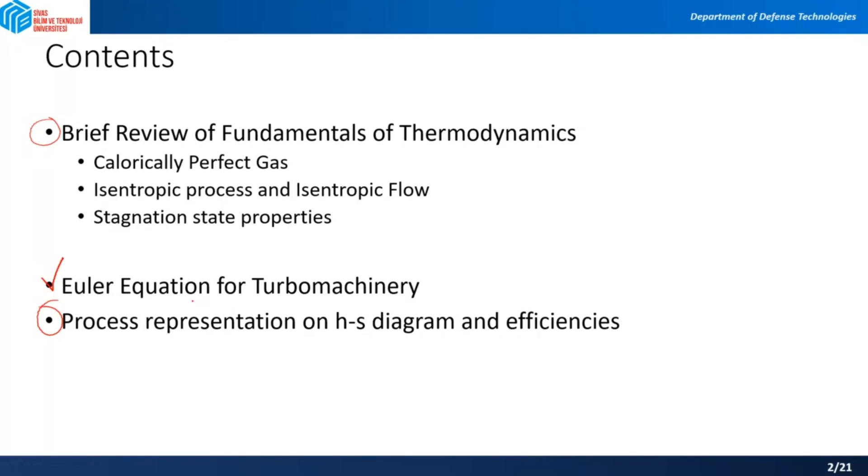Especially from this Euler equation for turbomachinery. So if you remember, we had a perfect gas, and we had these assumptions there to enable us to use the kinetic theory of gases. What are those assumptions?

First assumption was that we have negligible or a small amount of intermolecular forces between molecules. And then we have the volume of molecules that occupies space, also negligible, and we usually ignore it. Based on these assumptions, we come up with the perfect gas law, and this perfect gas law is actually derived from the kinetic theory of gases.

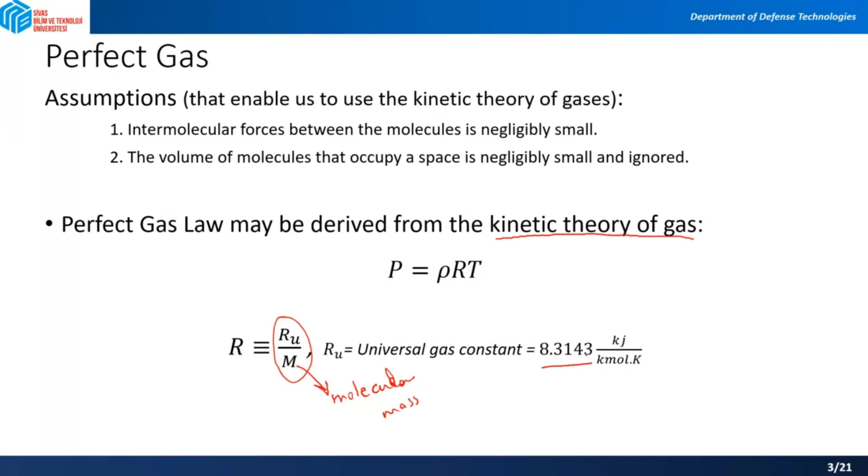You remember this also from early studies in physics: P is equal to rho RT. And what is R in here? R is the gas constant, and it is defined by the universal gas constant divided by the molecular mass of the gas. M is the molecular mass, and RU, the universal gas constant, is equal to 8.314 kilojoule per kilomole Kelvin.

As another reminder, you had these specific heats for a perfect gas. PG stands for a perfect gas, and also calorically perfect gas. Remember, you had in your thermodynamics, aerodynamics courses, a defined specific heat at constant pressure and volume. For example, if you use your enthalpy, you define H as the multiplication of the specific heat at constant pressure by your temperature.

In general, we were saying that your Cp, specific heat at constant pressure, is a function of temperature. And the same applies to the internal energy, and it's equal to Cv dT. So Cv is the specific heat at constant volume, and that is also a function of temperature.

And there is a simplifying assumption of constant specific heats. So whenever we say Cp is constant, Cv is constant, we generally simplify this because these are a function of temperature. But if we are dealing with a narrow temperature range, we assume that for a calorically perfect gas, these two will be constant.

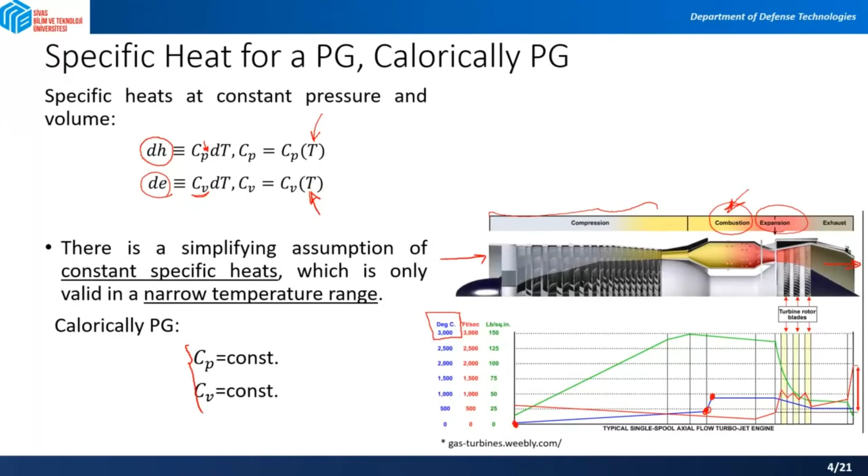It is a point function. So this total energy is actually the summation of what? Internal energy, kinetic energy, and potential energy. So we have these three together. But when you look at this first law in an open system, the open system is a system that is interacting with the environment. So it has some inlet, it has some exit, like the jet engine I previously showed you in this slide. You have this inlet, and at the end you have this exit.

So you have to use the open system shape of the first law. What is changing when you compare it to the closed system? Actually, for open system, you write everything as a rate. So what do I mean by rate? Rate means...

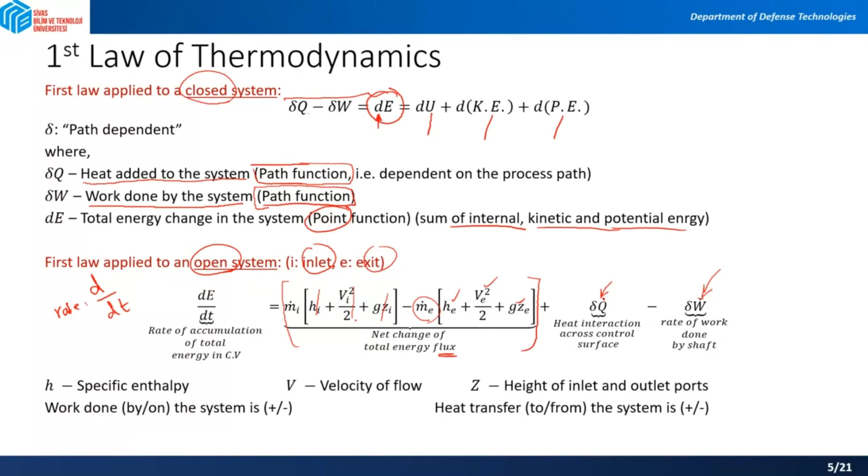This is the representation of the first law applied to an open system.

Now let's look at the second law. As you know, it is a statement of the impossibility of a heat engine - a heat engine exchanging heat with a single reservoir and producing mechanical work continuously. Actually, the second law says that you cannot have a machine that is just interacting with one source of heat and then gives you mechanical work. It necessarily has a second reservoir at lower temperature where heat is rejected.

So you remember from your thermodynamics that you have some heat engine. It absorbs some heat from your source, and then it gives heat to a sink, and it gives you some work as well. This represents that all mechanical work may be converted into system energy, whereas not all heat transfer to the system may be converted into system energy.

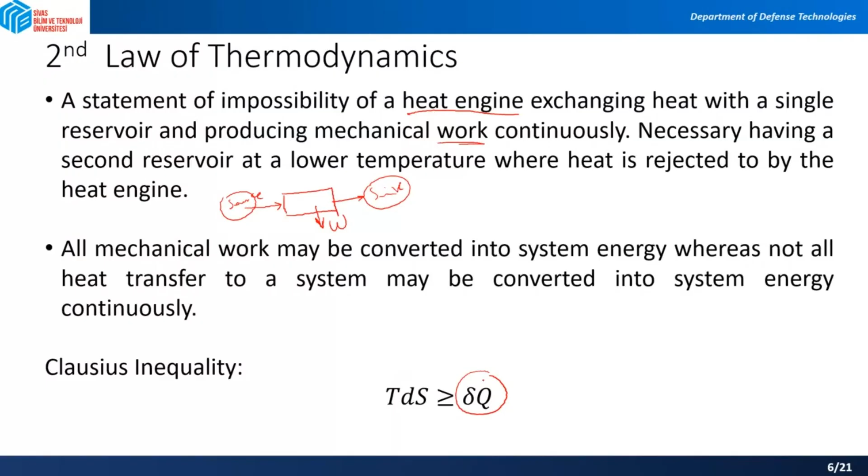Based on this, you have the Clausius inequality: TdS is always greater than or equal to your delta Q. So what do we have here? We are not talking about work. The second law actually distinguishes between the work and heat, having nothing to do with the work.

This is the difference between the first law and the second law. In the first law you have no distinction between the heat and mechanical work exchanged with the system, but in the second law you actually saw that it only involves the value of the heat, so you have a distinction between heat and work.

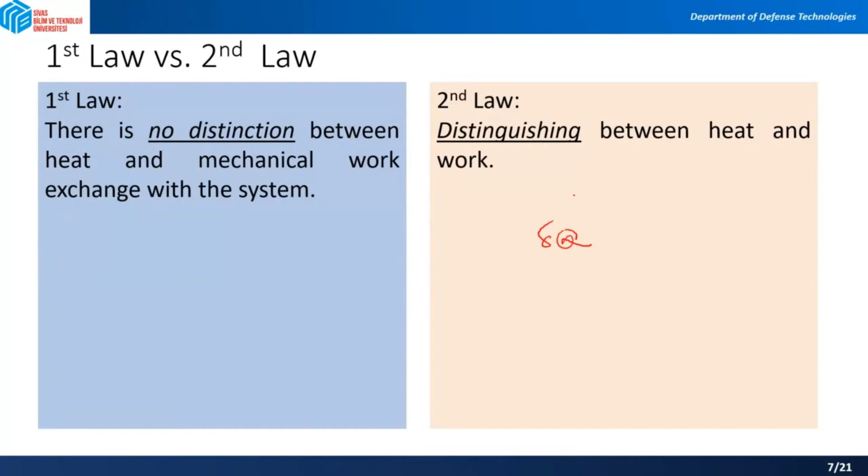So if you combine the first law and the second law, what will you get? You get the Gibbs equation. Remember.

We have the pressure forces within the fluid performing reversible work, and the viscous stresses account for dissipated energy of the system into heat. So if you write it as TdS equal to dE plus P d(nu), and then define your enthalpy as a combination of the two forms of fluid energy - one is internal energy, and the flow work, which is P nu - you remember you could write the change in enthalpy as dE plus P d(nu) plus nu dP, and then if you substitute dE into here, you come up with the last equation. This equation is very important, so keep it in mind.

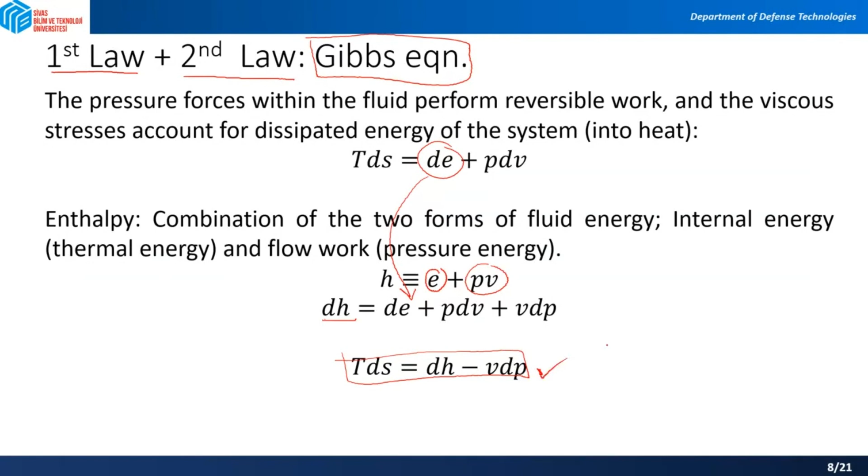When we are using the Gibbs equation, you can come up with the entropy change in the process. How? You can define the entropy change as Cp dT over T minus nu over T dP, and then integrate both parts of this, and you will come up with S2 minus S1 as the change of entropy delta S, and on the right hand side you have the integration from point 1 to point 2 of this term and this term. So what happens to these two terms?

For a calorically perfect gas, remember that in a narrow temperature range Cp is constant, so Cp comes outside of this integral. So you have Cp ln(T2 over T1) minus R ln(P2 over P1). But for a non-calorically perfect gas, Cp stays inside the integral.

What do we do exactly with this? We actually take Cp at point 1 and take another value at point 2, so we're going to have two different values at points 1 and 2, and these values are actually tabulated in tables.

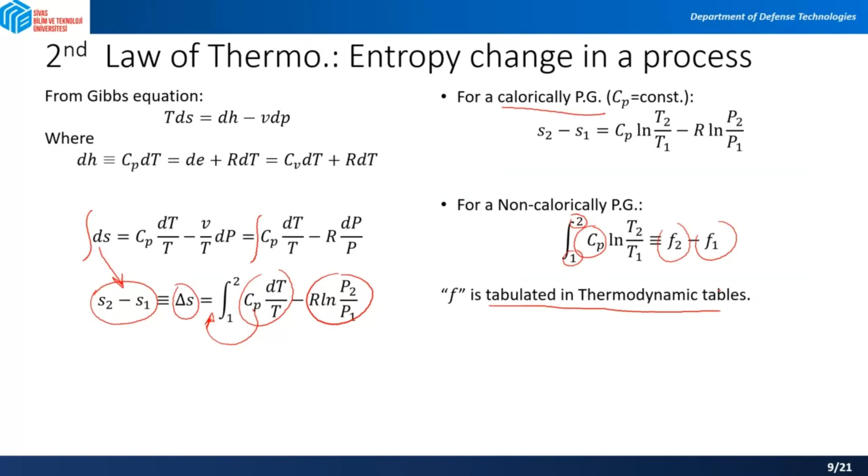We have the specific heats and also their ratio. Remember, already for these, you can write Cp equal to Cv plus R, and if you divide everything by R, you come up with two equations that are very important to us: Cp is gamma over gamma minus 1 times R, and Cv is R over gamma minus 1.

What is gamma? This is the ratio of Cp over Cv. This gamma is actually related to the degrees of freedom of the gas molecules, given by n plus 2 over n. What is n?

Let's say, for a diatomic gas, diatomic gas is something to... and etc. For diatomic gas, because of the atoms, right? For diatomic gas, which stays at normal temperatures - what do we mean by normal temperature? Temperature that is less than 600 degrees, we say this is a normal temperature.

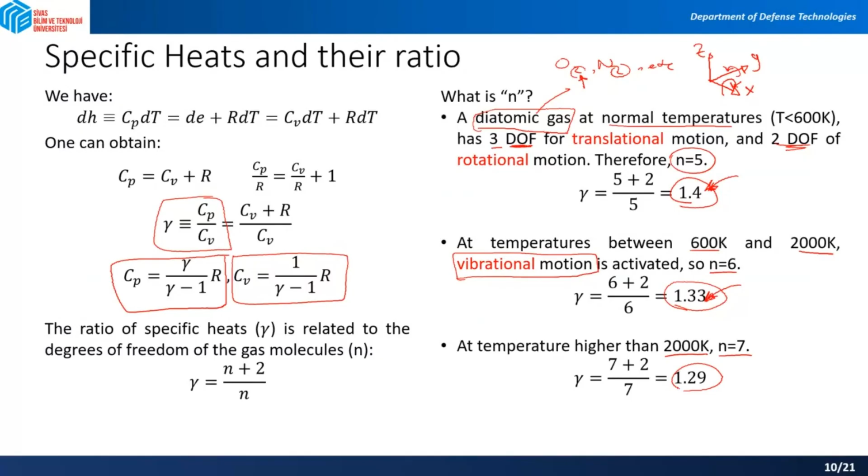In your courses, maybe in propulsion or gas turbine engine courses, you saw that sometimes they use 1.33 as the gamma for the gas inside the combustion chamber, because the temperature there is so high. And above 2000 Kelvin, another mode of motion is activated that makes n equal to 7, and then your gamma decreases again to 1.29.

As I said, these specific heats, Cp and Cv, are functions of temperature for ideal and real gases. We know that this variation with temperature is due to vibrational and rotational energy, as we discussed in the previous slide. Now, what I have here is from a thermodynamics textbook.

In this picture, you can see that for different kinds of gases, like monoatomic gases here - argon, helium, neon, krypton, and xenon - and diatomic gases like hydrogen and oxygen, and for carbon dioxide, water, and also for air, you can see the variation of your specific heat at constant pressure with temperature.

You can see that for the monoatomic gases, it is always constant, not depending on the temperature. Why? Because these monoatomic gases have their internal energy contributed only by translational energy. So while we said other gases have vibrational and rotational energy, monoatomic gases only have translational energy. Based on this, these values are constant.

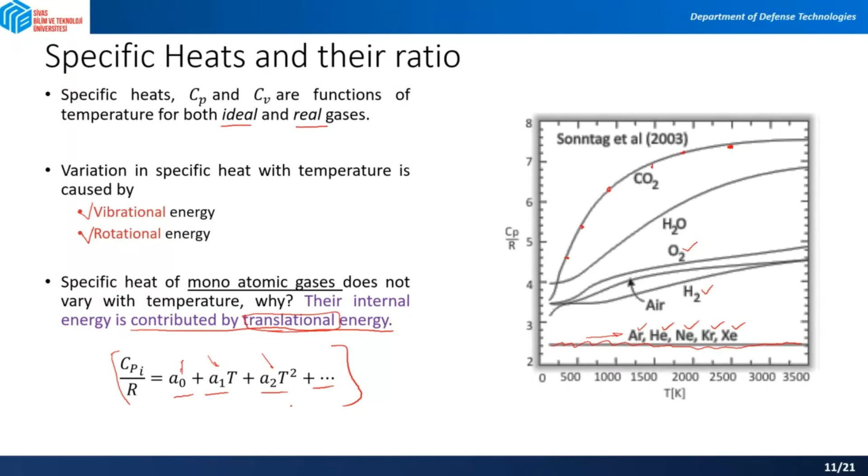Okay, that's enough for the thermodynamic laws and stuff. Now let's go to the isentropic process. From the Gibbs equation - you remember this Gibbs equation? How did we come up with this Gibbs equation? From the Gibbs equation, you can actually derive this relation.

P2 over P1 is T2 over T1 to the power of gamma over gamma minus 1. And if you use the perfect gas law, you can convert this to relate pressure to density as well. So these are the things you're remembering.

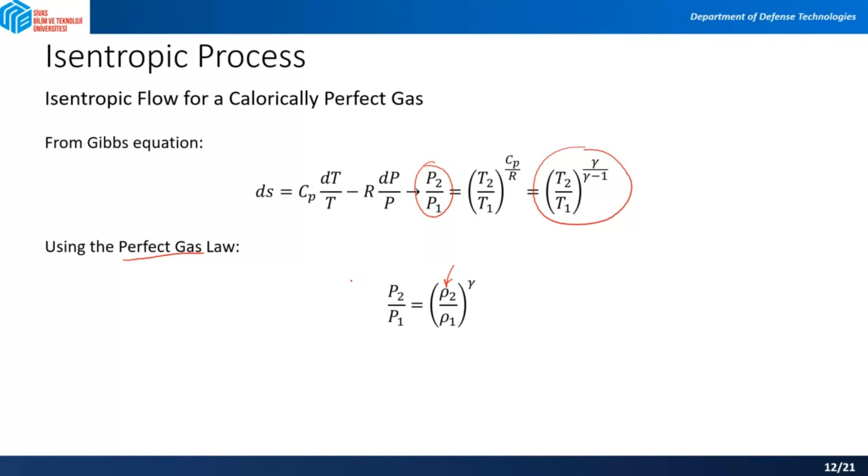And you're also familiar with the stagnation state. What is the stagnation state? It's state zero. It's actually a state of a gas that is reached in decelerating a flow to rest, reversibly and adiabatically, without any external work. So you're imagining a gas that you're bringing to rest, so there is no velocity.

Stagnation means rest, but there is no external work, and you do this in a reversible process, and also it is adiabatic. So there is no heat, and also there is no work. W is equal to 0, Q is equal to 0.

What do you end up with is the definition of the stagnation properties. For example, here you have the definition of a stagnation enthalpy, which is your static enthalpy plus your dynamic enthalpy, V squared over 2.

So we know that the total energy of the gas does not change in the stagnation process. Why do I put this in here? Because it's much easier for us to conduct with stagnation properties rather than the static. We are always interested in stagnation or total properties in turbomachinery.

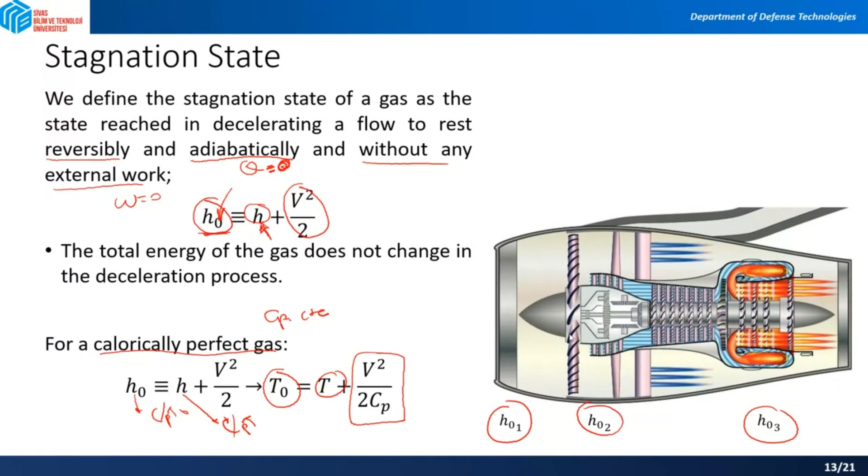Now we are dealing with the turbomachinery course, and the first thing that we have to, let's say, consider is the Euler equation for turbomachinery.

And normally you are assuming everything in the cylindrical coordinate system. So cylindrical coordinate system has the axial direction, radial direction, and tangential direction. Axial direction is the direction that flow normally gets inside the turbo machine.

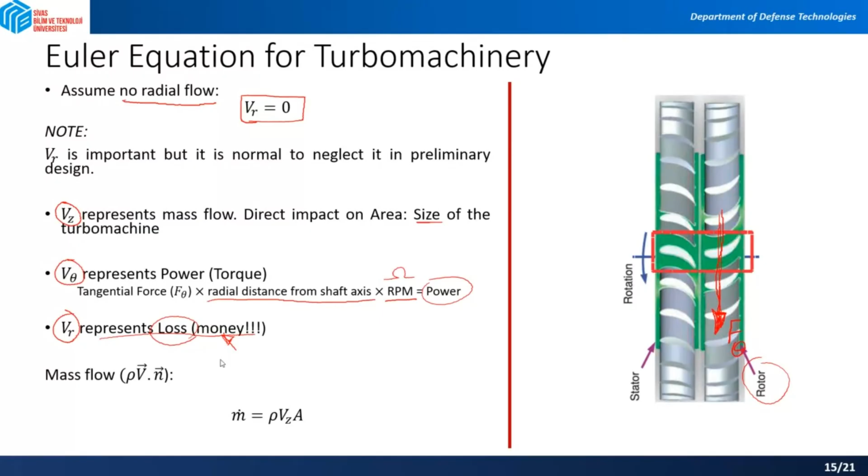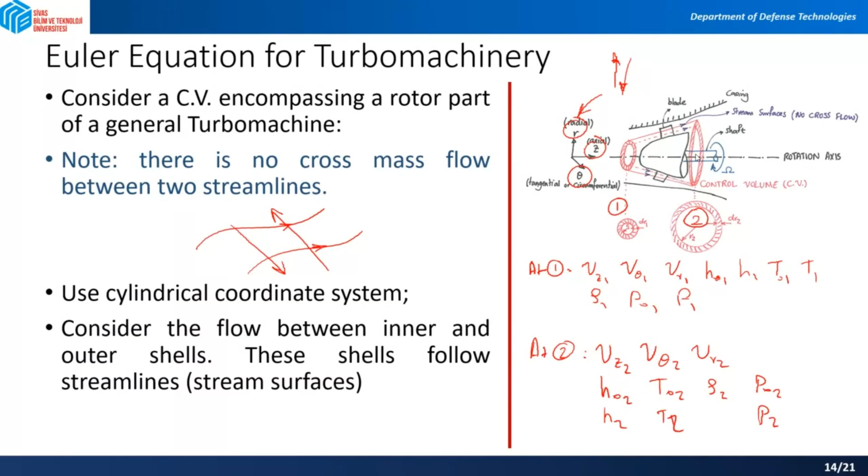So far we introduced the control volume to you, which encompasses the rotor blade that is rotating. We said that you just account the entrance and exit of this control volume, and you can actually write equations of motion like the continuity equation, then angular momentum conservation, and finally the energy conservation equation.

Let's start from the continuity equation. By the way, the derivation of these are not very important. You just need to be able to distinguish the inlet, the outlet, and what they represent. Continuity says that whatever comes in goes out, right? So the inlet at station 1 and the outlet at station 2, you just equal them.

Angular momentum, what does it say? Angular momentum actually says that there is some torque that is applied on the stream tube at the shaft. This is your torque. How? Rho times dV is your dm, and we said that if you have your tangential force, multiplied by radial distance, divided by your dm, you will come up with torque.

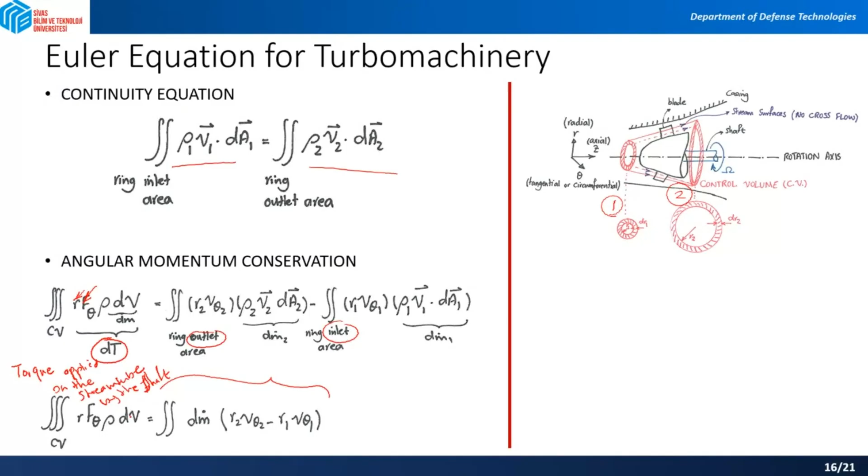The last thing we came up with is this: torque is dm dot times this, and we said in previous slides that power is nothing but omega multiplied by your torque. So you come up with this: power of the shaft is equal to omega times m dot times r2 v theta 2 minus r1 v theta 1.

Note the minus sign in here. You have to consider this minus sign in the equation. Why we are using this, we will find out in the next slide, and we will probably do it as an exercise. If you put this minus sign, it's actually dealing with the sign of the work that you are dealing with — whenever the work is positive, whenever the work is negative.

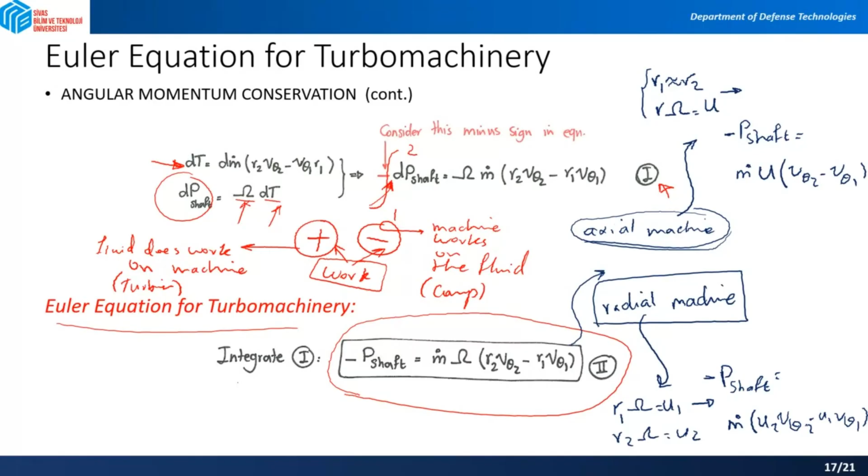Now if we go to the third equation, which is our energy equation, remember we said that Q minus delta W equals dE. So if you write it for an open system, you need to write everything in rate form, so you write Q dot...

Energy change is actually the enthalpy change from 1 to 2. So you have this with the mass flux because it's an open system, and you have two rates of the work.

Rate of work is called power. Work per unit time is power. You have either shaft power or shear power. Shear power is friction, loss of energy. Shaft is giving some power, and there is loss of this power inside shear power.

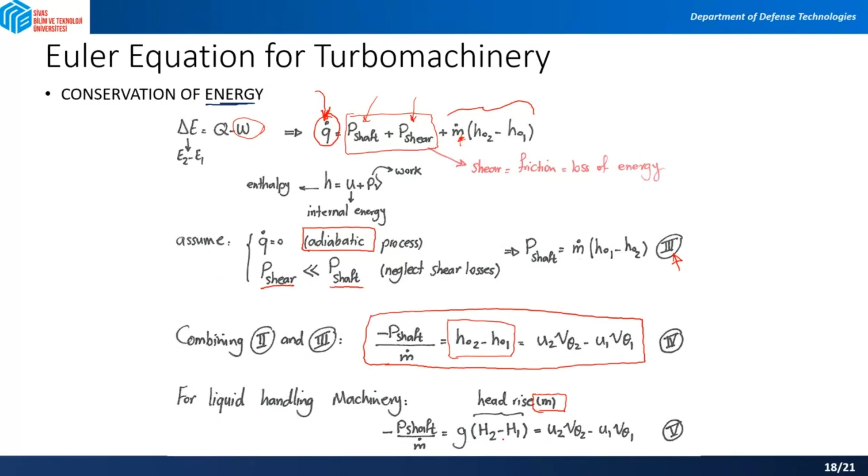So let's have a look at the final session for today, which is the process representation on the enthalpy-entropy diagram and the efficiencies.

Remember from your thermodynamics courses, when you were compressing or expanding gas from point 1 to point 2, you were assuming either an ideal process, which is isentropic compression or expansion, or a real process, which was not a vertical line. Based on this, you probably defined the compressor or turbine efficiency as the ratio of ideal work to actual work.

The ideal work, if you remember from the first law, is isentropic or adiabatic, so there is no work, there is no heat transfer. So Q minus W equals delta H. If there is no Q, your work is delta H. Ideally it goes vertically, from H01 to H02s.

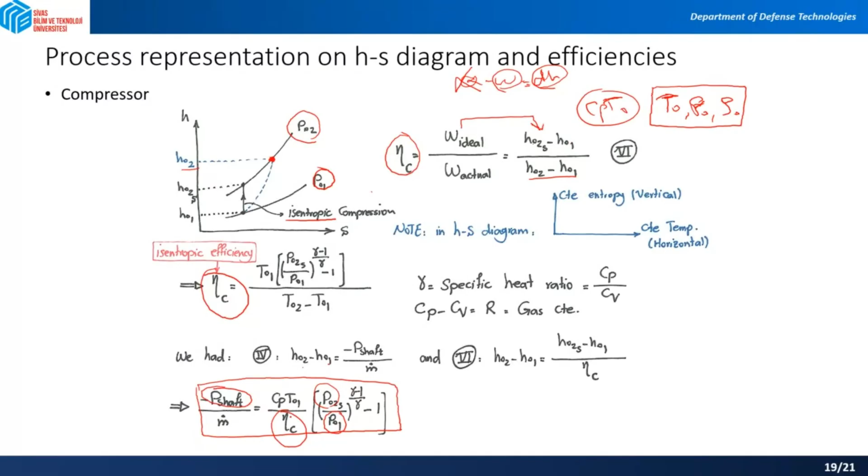The same applies to the turbine. In the turbine, the flow expands, going from station 4 to station 5. Why do we call them 4 and 5? In propulsion and jet engine notation, we number the stations of the jet engine like this, so the inlet of the turbine is 4 and the outlet is 5.

The inverse is happening, expansion is happening, and based on this we are defining the turbine efficiency as well.

Actually, these efficiencies are called isentropic efficiency or total-to-total efficiency. We use them where we are interested in the exit jet.

But remember, for turboshaft engines, there is no need for jet velocity. We were defining total-to-static efficiency using T05s and T5, because any kind of kinetic energy in a turboshaft engine is actually a loss for us. We just need to minimize the exhaust.